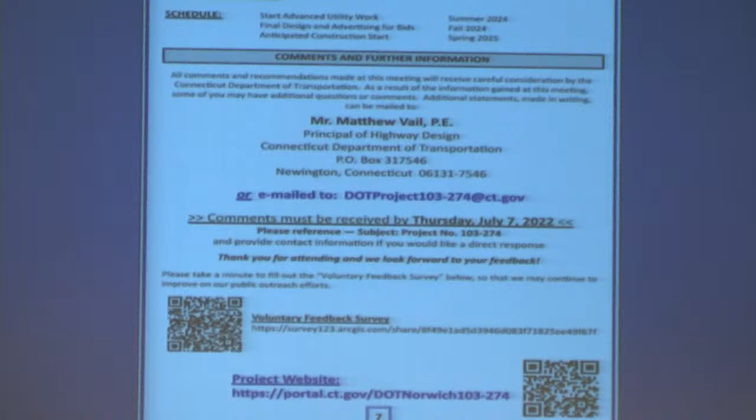Also tonight we have Mr. Matt Vail sitting at the table over there. He's the lead of our state highway design unit for in-house state design. On the back of the handout is Matt's contact information. So if you want to write to him, inside your handout, there's a paper pullout. You can write your comments on that paper pullout, fold it, put a stamp on it. It's already addressed to Matt. Comments will go to him. If you prefer to send an email, the email address is on the back of the handout as well. You don't have to write it down.

It's right there. In addition, we have other project information and resources at the project website. That's on the bottom of the handout as well, and there's a QR code that goes with it to bring you right there. That will get you digital copies of the handouts. Eventually a recording of tonight's meeting will be posted on that website. We also have surveys available on that website, and there's going to be a video of the project visualization available on that website too. So that's a good follow-up resource to look at in the next couple days for more information.

A little bit of housekeeping information. Okay, there's a demographic survey available on that website also. Civil rights flyers are on the table when you came in the room. No person shall, on the basis of race, color, national origin, be excluded from participation or subject to discrimination in the development of this project.

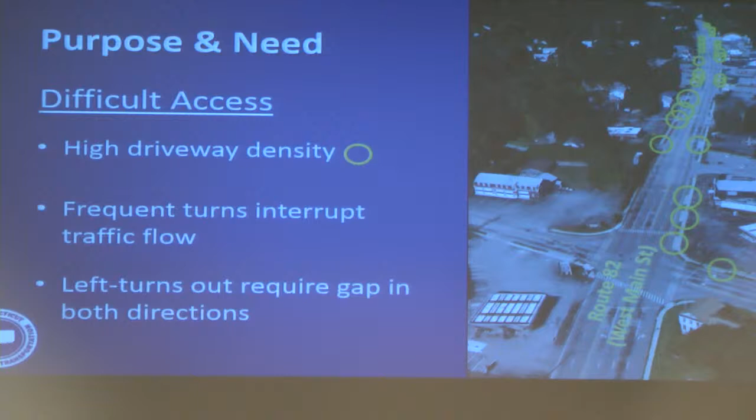Shown on this picture is Route 82. All the yellow circles indicate curb cuts. Those are driveways, most of them commercial businesses. Some of the businesses have 2 driveways. Traffic traveling on Route 82, 4 lanes, making left turns into the driveways, often backs up traffic in the through lane while they're sitting to make a left turn. Vehicles trying to get out of the driveways have difficulty exiting. They have to get gaps in traffic in both directions to be able to make a left turn, and in both directions it's 4 lanes. These maneuvers often result in sideswipe type crashes, rear ends, people getting frustrated, and poor traffic operations as traffic backs up behind a left turning vehicle.

In addition to the high number of curb cuts along that section of roadway, we also have 7 closely spaced traffic signals. And again, we're here tonight to look at Phase 1, 103274. That's the easterly portion of the work, mostly running from the Asylum Mechanic Street area, and will extend up through Dunham Street.

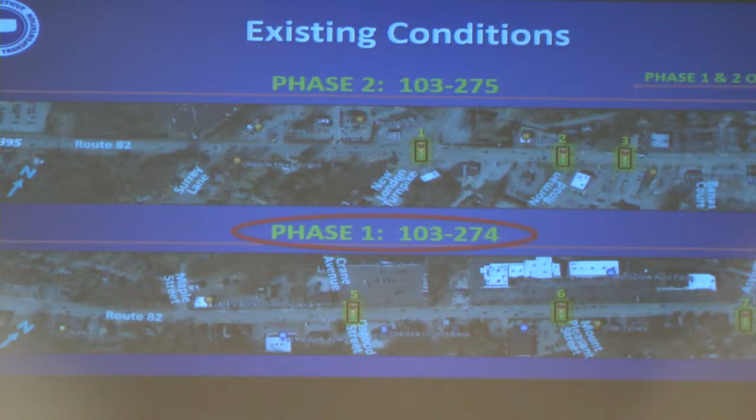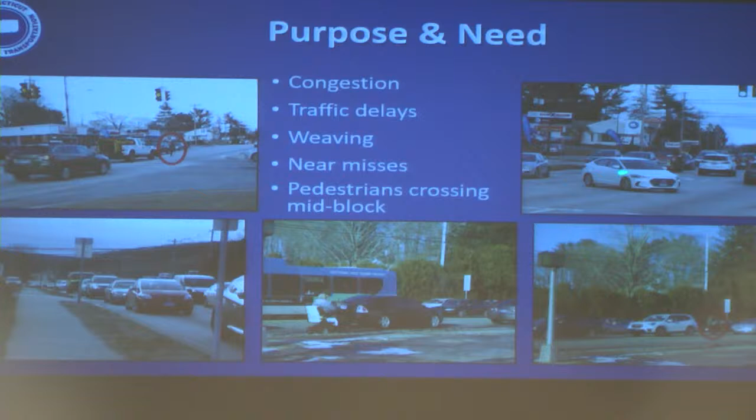This is your community. You live here, you drive it every day. These are the things that you see. Traffic congestion, pedestrians having difficulty crossing the roadway, vehicles wanting to make a left turn, having a hard time getting a gap, making that maneuver. Down by Asylum Street, more of the same thing. Pedestrians crossing the roadway with a very long crossing distance exposed to traffic. Vehicles wanting to make a left turn, stuck in a very congested intersection. Vehicles wanting to pull out of a commercial driveway, having a hard time finding a gap. Weaving, vehicles in the left lane, trying to get around a left-turning vehicle.

Here's a video of the Mechanic at Asylum Street intersection. It's your community, you guys see this, but just some reminders of what happens. This pickup truck changes lanes. That often results in sideswipe maneuvers, the weaving. That's very common. This SUV, he wants to make a left turn, but he can't. And he's getting impatient because he keeps inching up. He's getting closer to the light, but he hasn't executed his turn. And this truck, he wants to make a left turn also. He can't find a gap. Here's another one going to execute a weaving maneuver soon and pull out into the right lane. The black SUV, he still hasn't made his left turn. He's waiting.

Finally, the SUV, he makes his left turn on a red light. At Willows Corner, Dollar General, commercial driveway. Pretty indicative of any of the driveways along the corridor. A vehicle waiting to make his left turn. Can't get a gap in traffic. He needs a gap in both directions to be able to make his turn. He's got a large number of traffic going eastbound. Can't find a gap. He's waiting.

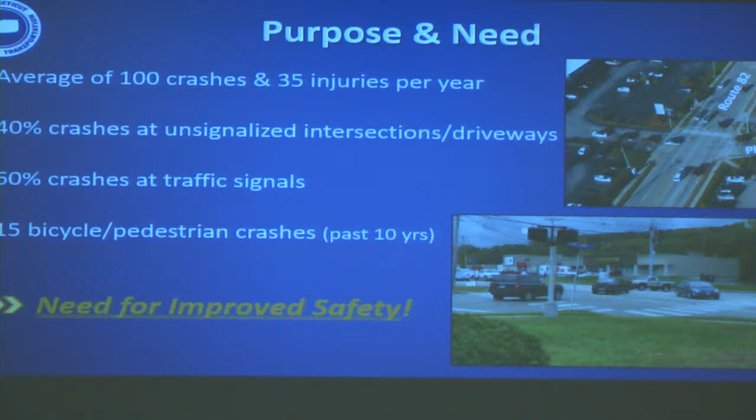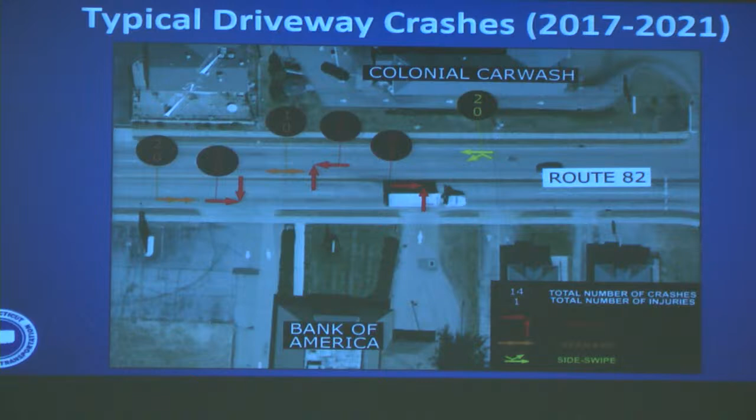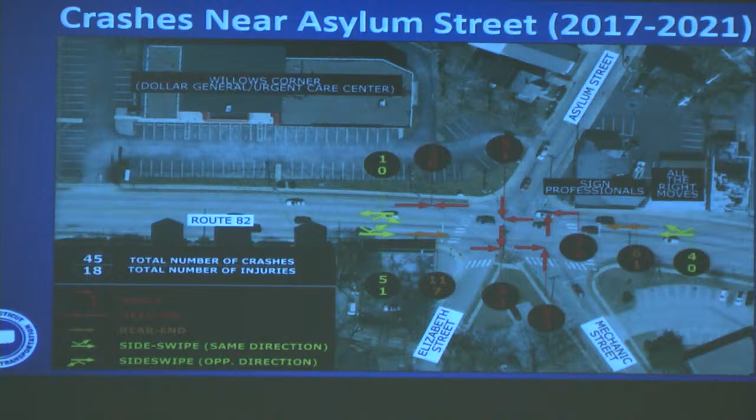Looking at Mechanic Street, Asylum, 45 crashes with 18 injuries in a 5-year period. Again, pattern crashes. These are the rear ends. We've got 6 rear end crashes going westbound, 11 rear end crashes going eastbound. The more severe ones are the angled crashes in the middle of the intersection. There's 5 of them coming off Asylum, 4 of them coming off Mechanic. These are the ones where people typically get hurt. And then there's a solution.

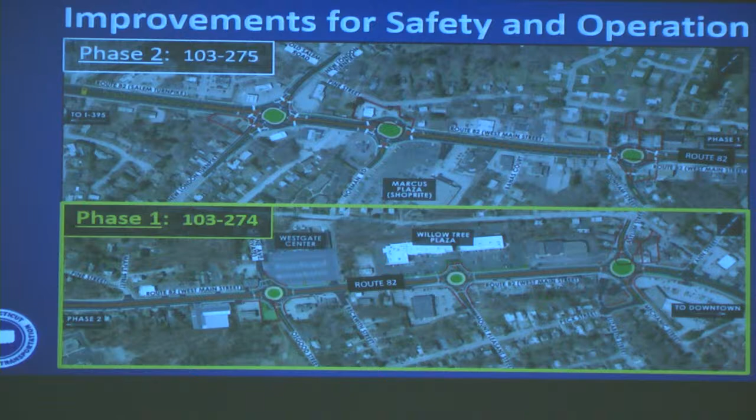To improve operation and safety, a median down the middle of the roadway restricts left-turning vehicles. That means when you're traveling on Route 82, all turns will be right turns. You turn right into the driveway you want to go in. If the driveway's on the other side, you go down to the roundabout, make a U-turn, go in. In addition, Phase 1 is going to have a road diet. That means it will go from a 4-lane roadway to a 2-lane roadway, 1 lane in each direction.

This shows how you would execute the U-turn to make a left, go down to the roundabout, go into your desired location. You don't have to stop and wait at a traffic signal. There's no waiting at a light. You don't have to stop in the left lane waiting for a gap in traffic while people pile up behind you, maybe worried about getting rear-ended. It's very simple. Go down to the roundabout, make a U-turn, go back, make a right. 1 lane in each direction. All turns are right turns. There's no crossing maneuvers.

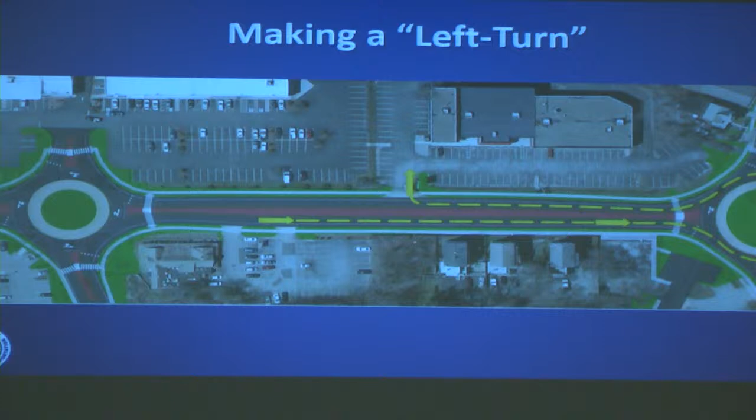We've built these types of safety features in other locations. We know they can work. They can work locally, and nationally there's data on them. The raised median, we know we can reduce turning crashes by 78%, injuries related to turning vehicles by 95%, and with the construction of the roundabouts at the intersections, we can reduce total crashes by 48% and severe injuries by 78% with this type of proposal.

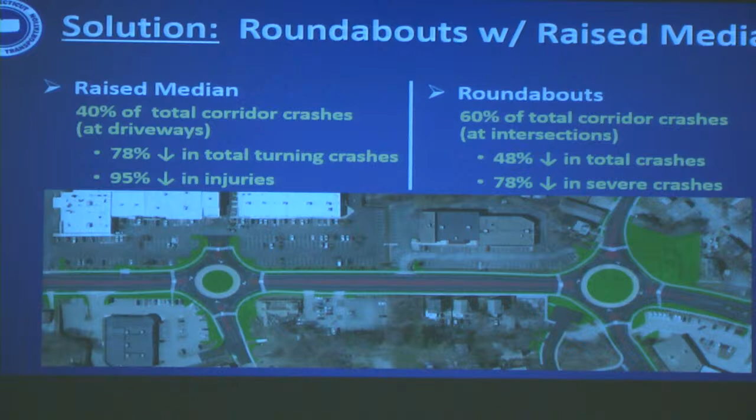One of our biggest successes, and also local to you guys, Salem, Connecticut, Route 82 and 85, a roundabout was constructed there back around 2012. I was part of the design team that led that project. Looking at the metrics years later, we found out it was a huge success. That intersection before construction had 23 crashes annually with 9 injuries every year. Almost 23 crashes, 9 injuries, people getting hurt. After we put the roundabout in, the crashes dropped 50%. Went down to 10 crashes with almost no injuries. It's a 90% reduction in injuries with the roundabout.

And the reason is the reduced speeds and removing the crossing maneuvers. There's no left turns, there's no crossing maneuvers. The crashes that occur at roundabouts, most of the time they're avoidable because people are going so slow, they can tap the brake and avoid the person that was coming at them. If there is a crash, it's usually a minor fender bender, as opposed to somebody getting hurt. But the good news is, we reduce crashes completely by 50%.

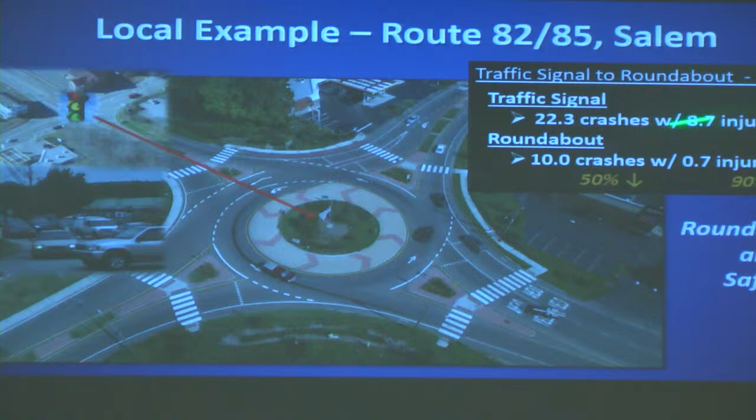And it operates very well. If you look at traffic, there's a lot of traffic flowing here. With roundabouts, you have concurrent movements going on all legs at the same time. These guys are coming in, going northbound, you have southbound traffic going, you have eastbound traffic going, all concurrently. Nobody's waiting at the light. They're all moving. It's improved efficiency.

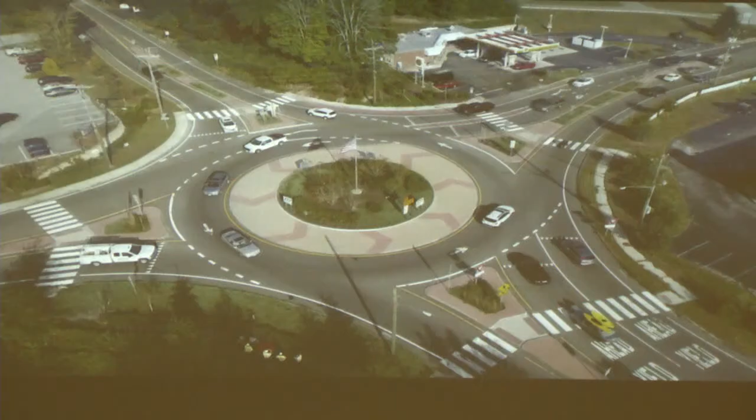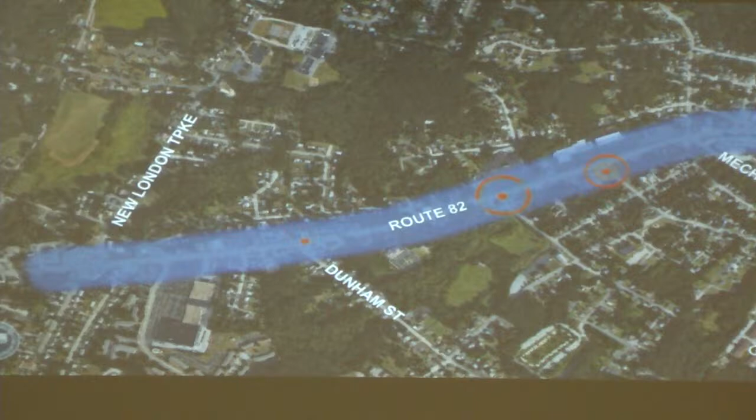The Connecticut Department of Transportation is investing in safety improvements on Route 82 in the city of Norwich. Today, the existing 4-lane corridor experiences higher than average crash rates following decades of commercial development and the addition of numerous driveways. The high number of access points makes it difficult for drivers to navigate in or out of driveways safely and efficiently. Utilizing historical traffic data and modern design software, the department has developed a proposal for operation and safety improvements.

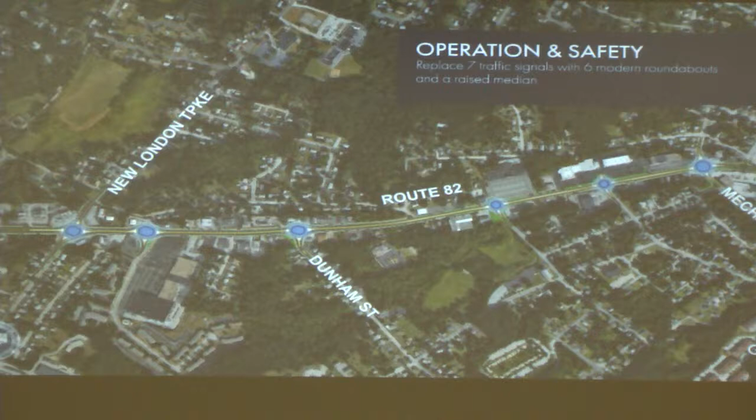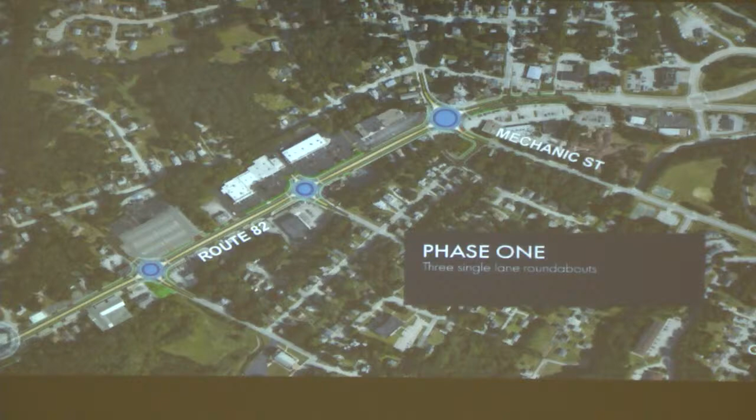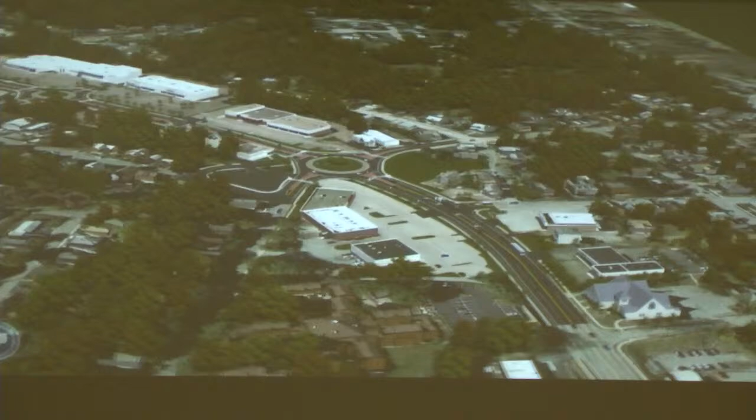The proposed corridor solution involves replacing 7 traffic signals with 6 modern roundabouts in addition to a raised median down the center of Route 82. Phase 1 of the project is to be completed first and will include the construction of 3 single-lane roundabouts along the eastern half of the corridor. The combination of roundabouts with a raised median will provide the most significant improvement in terms of safety for all roadway users. This design will provide a higher level of mobility to the businesses in the corridor with its efficient,

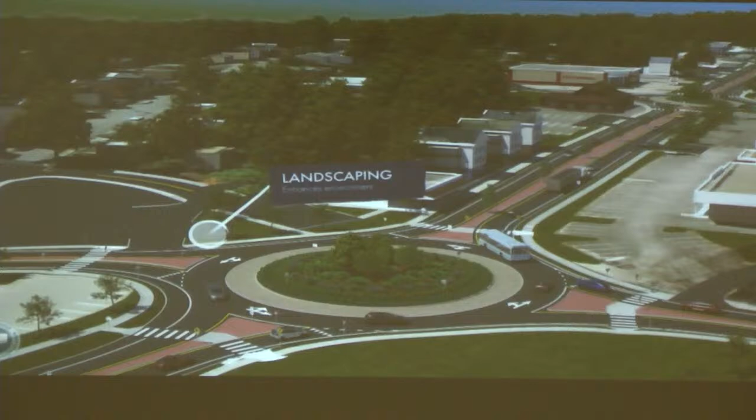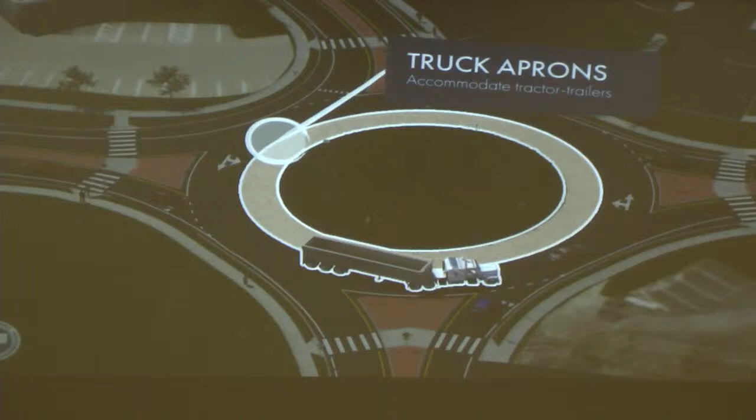free-flowing traffic features. The Phase 1 design will reduce the lanes down from 4 to 2, known as a road diet, further enhancing safety. Landscaping throughout the corridor will enhance the environment and create a more appealing experience for the Norwich community. Native plantings will be placed in the center island of each roundabout. Roundabouts will provide safer pedestrian crossing with less interruption to traffic and convenient U-turn capability for drivers looking to access local businesses. The rear wheels of a tractor-trailer truck will be able to mount the center island truck apron as needed to navigate the roundabout, while buses and other smaller vehicles will be accommodated within the limits of the paved circulating lane.

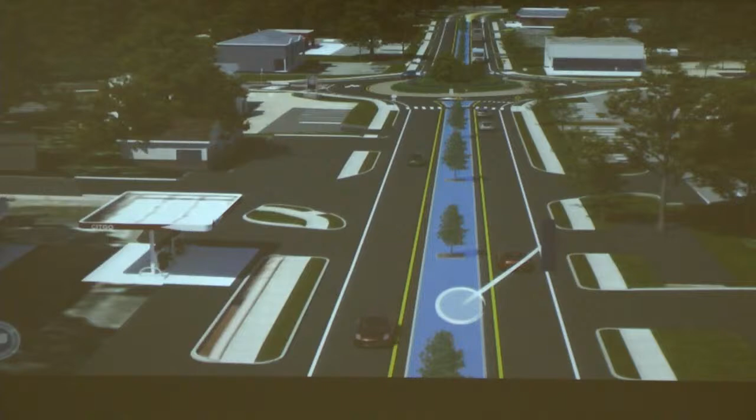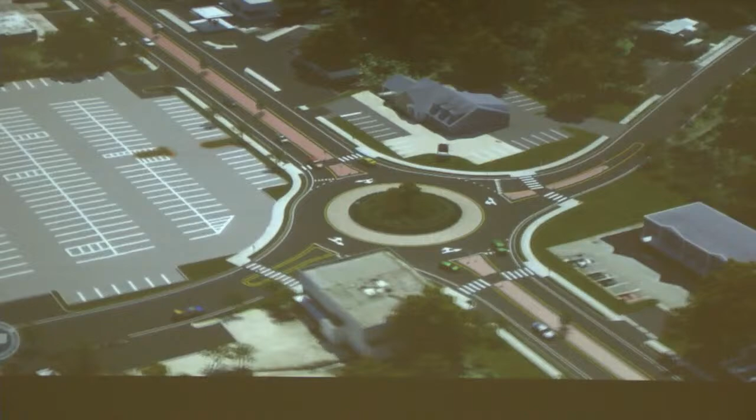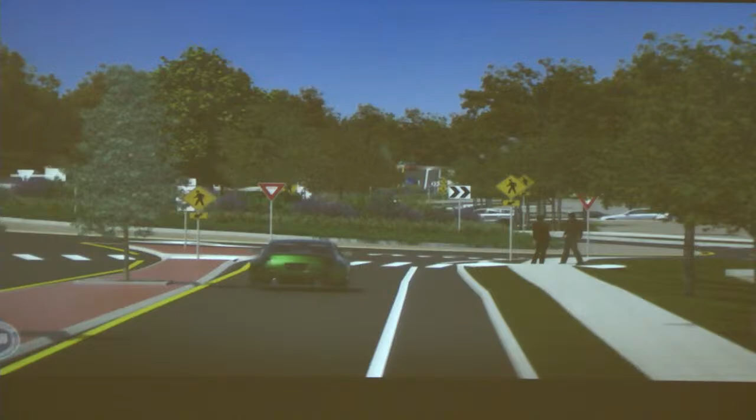The raised median on Route 82 will restrict left turns into and out of driveways. There will be an expected decrease in total turning crashes by about 78% and decrease injuries from crashes by nearly 95%. This change in conjunction with the new roundabouts will aid in traffic calming, slowing speeds through the corridor, promoting a safer environment for drivers and pedestrians alike. Despite slower speeds, there's a projected 25% reduction in travel time due to the removal of inherent delays associated with traffic signals. The entire Phase 1 corridor will incorporate 5-foot outside shoulders to accommodate bicyclists traveling along Route 82. The redesign of Route 82 will provide aesthetic enhancement and a more efficient corridor, creating a safer environment for motorized and non-motorized users alike.

So everything I discussed, that could happen in your community. Just a quick look at what it could be like. And now Mike Larice, the project engineer, he'll go through some more of the detailed design with you. Thanks, Scott.

As mentioned, the improvements on Route 82, the full movements, will involve replacing 7 traffic signals with 6 roundabouts. Because of how big of a project that would be, we decided to split it up into 2 separate projects. Phase 1 is in blue, Phase 2 is in yellow, and then this green area just represents a location where there's going to be work done during both phases of the project. So tonight's meeting is going to be just Phase 1. Like Scott mentioned, we're at like 30% design, whereas Phase 2 is still on the concept level.

So this is our proposal. It's 3 single-lane roundabouts, as well as a turnaround at the Dunham Street Route 82 intersection, which I'll cover a little bit more later. In addition, we have a raised median along all of Route 82, which is going to restrict left turns, and any vehicles that need to access a business or a residential property on the other side of the road can make a U-turn at the roundabout. So I'm going to go over each one of these intersections in a little bit more detail, but I did want to cover some benefits of roundabouts first.

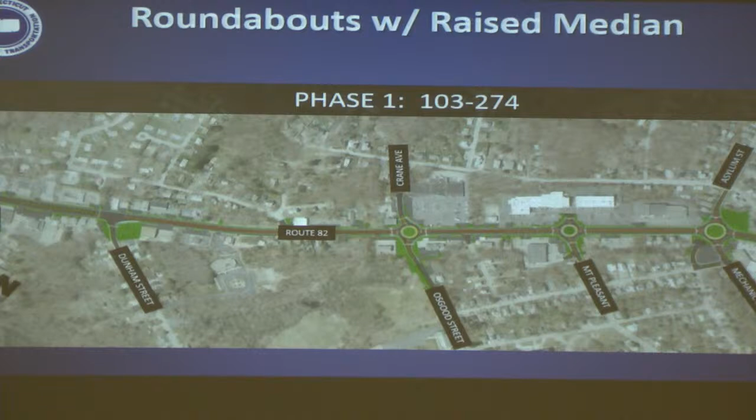So these diagrams show conflict points at the existing Route 82 intersection and compares it to our proposed roundabout. So all of these little dots, they represent a point where 2 vehicles could hit each other and there could be an accident. The red ones in particular are crossing conflicts, and they have the highest chance for injuries. Those are your T-bone accidents.

The existing intersections at Route 82, total of 40 conflict types, or conflict points, whereas at the roundabouts, you're only going to have 8, and more importantly, you're going to remove all of those crossing conflicts. And that's why we see such a safety benefit when we install these roundabouts.

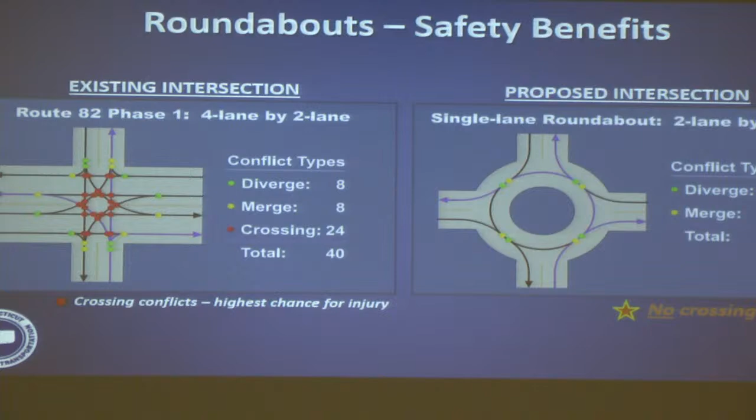The design is going to accommodate large vehicles very well. As you can see in the video up here, tractor trailers can mount the center truck apron in order to make all of their turns. And the diameter of the roundabout is going to be large enough that buses and fire trucks can navigate through the roundabout while staying on the paved surface.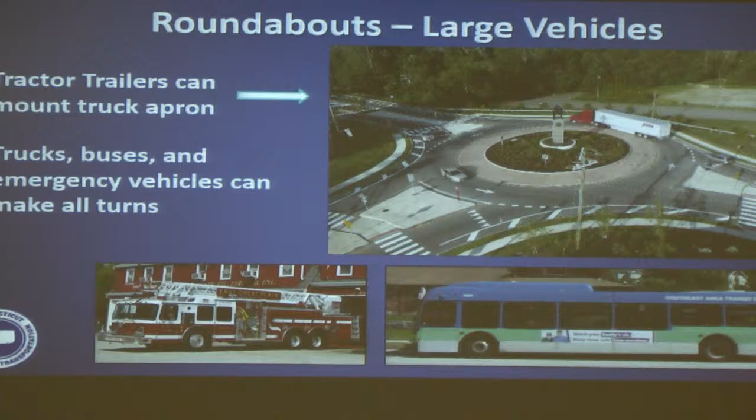If there was any type of emergency, though, that truck apron is mountable, and an ambulance or a fire truck would be able to mount it and get where they needed to go. Bicycles and pedestrians are going to be accommodated very well. We expect speeds through the roundabout to be 15 to 25 miles per hour.

Bicyclists are going to have 2 options. As they enter the roundabout, they can join traffic and navigate through the roundabout concurrently with traffic, just like you see in this picture. Or if they're not comfortable doing that, when they get to this crosswalk here, they can just dismount and walk their bike down the sidewalk, across the crosswalk, and continue through that way. Pedestrians are going to do something similar. They can walk down the sidewalk, cross the crosswalk, and continue on their way.

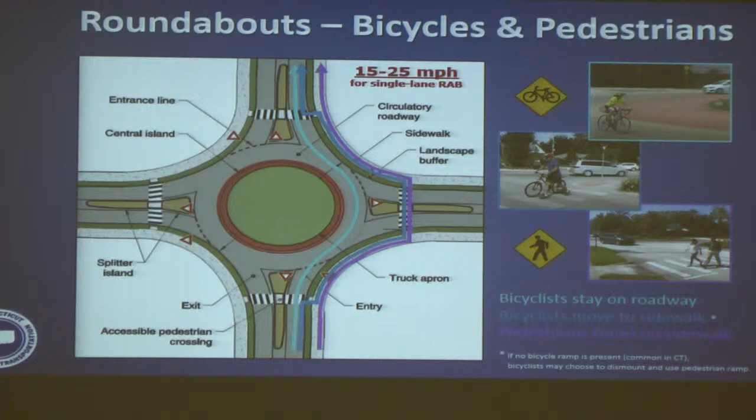One benefit that pedestrians are going to have is they're going to have a much shorter unprotected crossing distance. So if you were going to try to cross at the Asylum Street intersection right now, it'd be about a 55-foot crossing, whereas with our proposed design, you're only going to have to cross 19 feet, and then you're going to have that center island refuge area where you can safely wait and then cross the next 19-foot section when there's a gap in traffic.

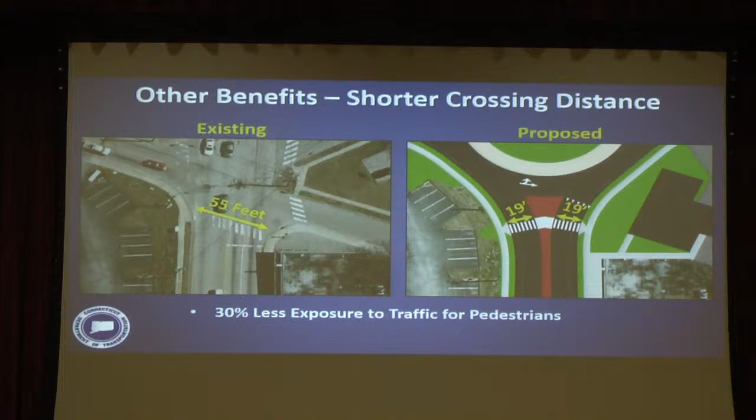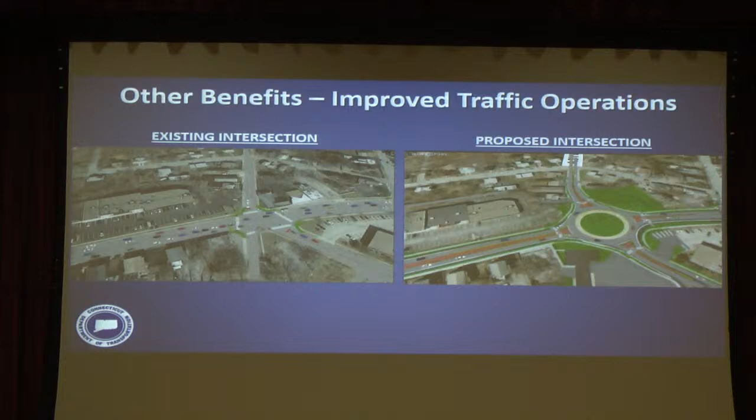This is a side-by-side simulation comparing the existing intersection to our proposed design. This is the same amount of traffic at the same time of day, and you can see how well the roundabout accommodates the design. There's very little backup, whereas at the intersection, whether you have a red light or whether you have a green light and people waiting to turn left, there's a lot of traffic backup on both sides of the road. And again, this is the same amount of traffic going through the simulation. So you can see how the roundabout performs much better.

From an environmental standpoint, as you saw in the previous video and on this video down here on the right, there's not a lot of stop and go traffic at roundabouts. It's much more of a rolling queue. Vehicles are constantly moving. That reduces the vehicle delay, but it also reduces the amount of emissions that are put into the air by vehicles, and it also simultaneously increases your fuel efficiency. And then there's the fact that roundabouts don't require electricity to work, whereas traffic signals do. So another inherent environmental benefit.

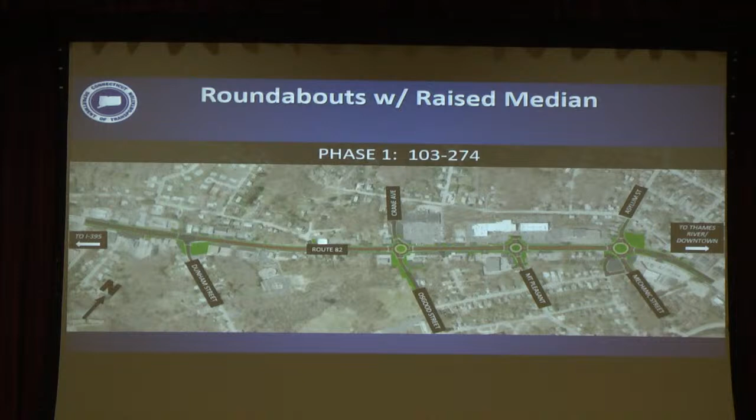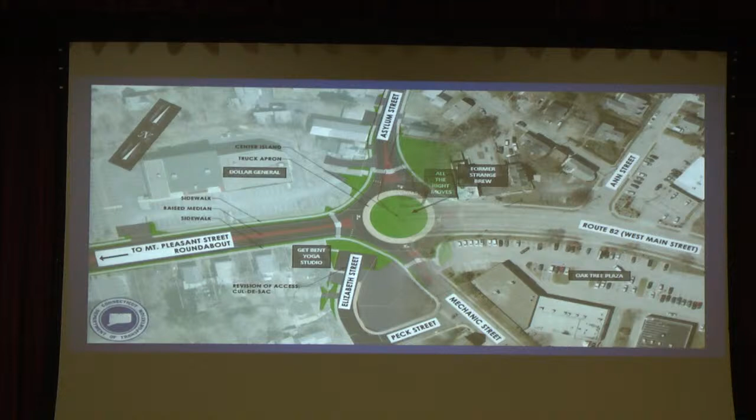So I'm going to go into each intersection now in a little bit more detail, starting with the Asylum Street Route 82 intersection. So existing, it's signalized. Elizabeth Street is a one-way road running away from Route 82. And as I bring in the design here, we have a legend on the bottom right, but all the green is going to be grassed area and landscaped, as you can see in the picture up here. On both sides of the road, the light gray is 5-foot sidewalk, and the red is that raised median that I mentioned previously. And this tan is the mountable truck apron to be used by tractor trailers.

So one thing I did want to mention on this slide is this 5-foot sidewalk that you see on both sides of the road. That's going to be the same at all the intersections, as well as consistent throughout the entire project limits.

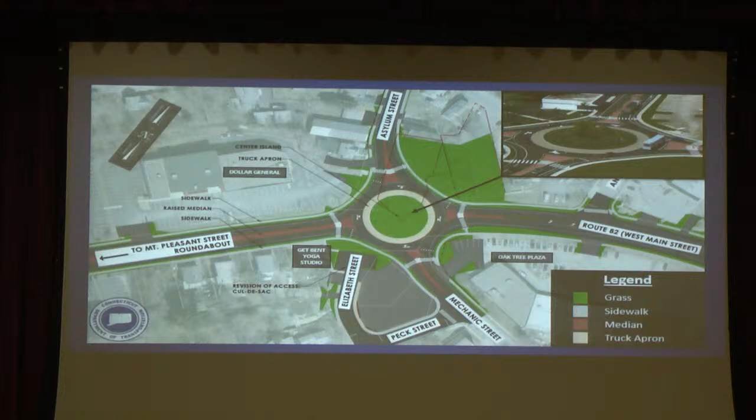In an effort to make sure that this intersection operated safely and efficiently, we did decide to cut off Elizabeth Street's access to Route 82. It was one way. We made it a two-way road, and anyone trying to access Route 82 can come down to Peck Street and take Mechanic Street to Route 82. As we continue west down the corridor, our next proposed roundabout is at the intersection of Mount Pleasant and Route 82.

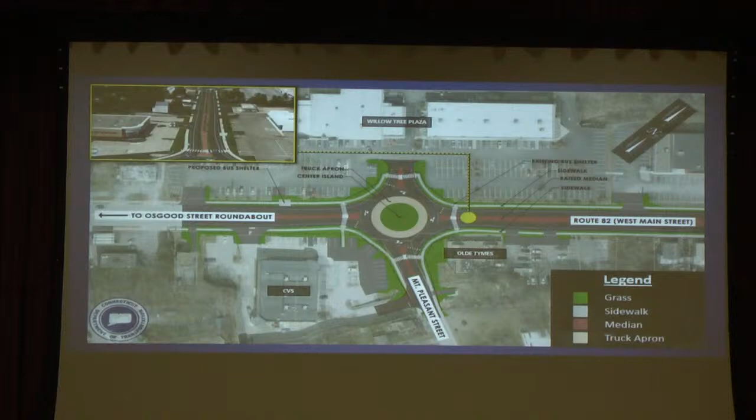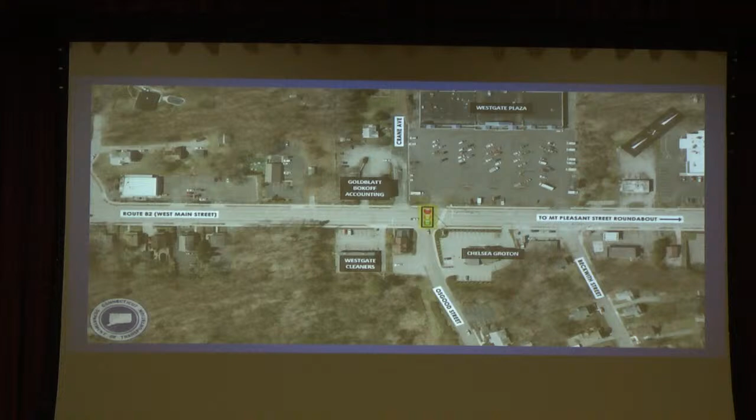So as I bring in the design, you can see that entrance is no longer there, so anyone who does this eastern entrance, they can come down through the roundabout and enter down in Crane Ave.

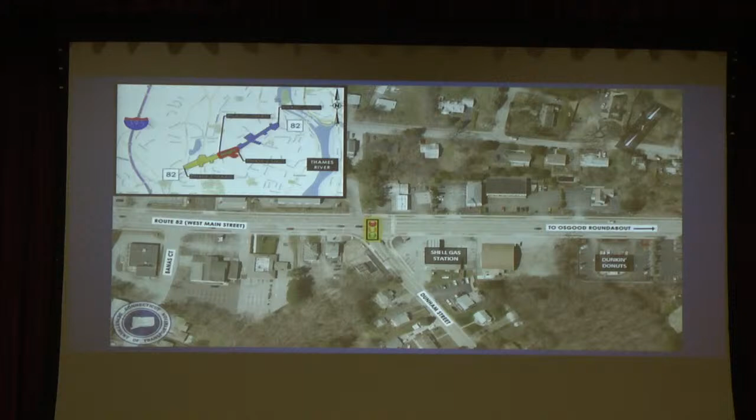So I've covered these three roundabouts, and we're going to continue west now to this Dunham Street intersection that I mentioned previously. This is in that green area where there's going to be work done during both phases of the project. As I bring in the design, you'll see that this intersection is going to remain signalized. So vehicles coming down westbound on 82 can come into this left turn lane, and then they can either turn left on Dunham Street, or they can make a U-turn maneuver and come down 82 eastbound.

And during Phase 2, this is going to become a roundabout at this intersection, but in between the two projects, we needed to ensure that vehicles traveling west on 82 could make this U-turn maneuver and access businesses on the other side of the road.

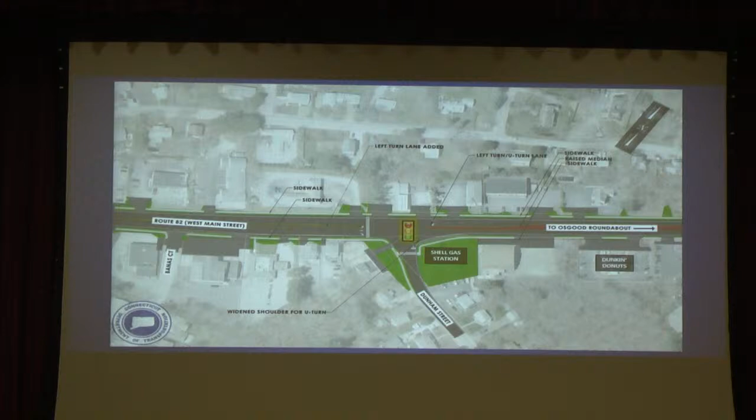There are some impacted properties with the proposed design. We're planning on 5 total acquisitions. The first one is going to be at the intersection we were just talking about. We'll be acquiring an Xtra Mart/Shell gas station. At the intersection of Osgood Street and Route 82, we plan on acquiring a barbershop/apartment building. And then at the intersection of Asylum Street and Route 82, we're acquiring 3 commercial businesses in order to accommodate the roundabout design. We also have 44 partial acquisitions or slope easements associated with the design.

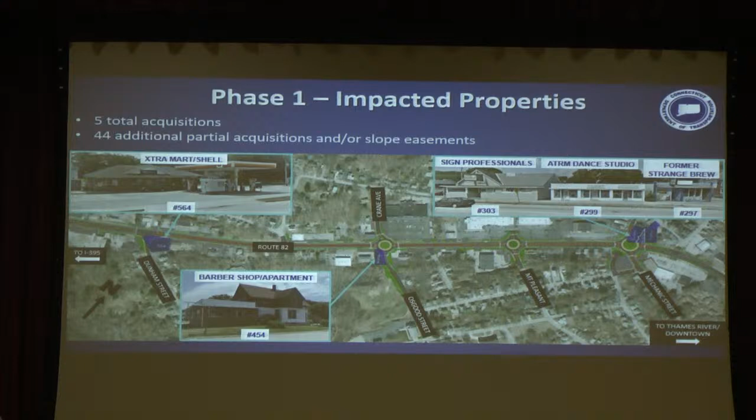And at this point, I'd like to pass the presentation over to Dennis, and he's going to cover the right-of-way process in a little bit more detail. Thanks, Mike. Good evening, everyone. My name is Dennis McDonald. As Mike mentioned, I'm a representative from the Connecticut Department of Transportation Division of Rights-of-Way. I'm just going to provide a brief overview of the right-of-way process.

So the function of the Division of Rights-of-Way is to acquire all property and property rights necessary for the project. This is done in accordance with the various statutes and regulations, including Connecticut General Statute Sections 13a-73, 13a-98e, as well as the Uniform Relocation Assistance and Real Property Acquisition Policies Act of 1970 as amended.

So once the right-of-way process is set to begin, each impacted property owner will receive a letter of intent to acquire, along with a property acquisition map. The letter provides a brief overview of the process, and the map provides a detailed visual representation of the specific property impacts. Soon after the letter and map are received or sent, a valuation process will take place, and once a value has been established, a written offer of compensation will be presented to each property owner. Property owners will be given time to consider the offer and negotiate if they wish.

If an agreement is reached, an acceptance document would be signed, and a closing would take place at a later date. If an agreement cannot be reached for whatever reason, the state will acquire the property rights via the condemnation process. Now, I understand this has a negative connotation, but many times this is done to keep a project on schedule. If the state does elect to pursue eminent domain, the original offer is deposited in the court system available for withdrawal, and property owners can continue negotiations or file a formal appeal for a reassessment of damages through the court system. If a property owner elects to file an appeal, it must be done within 6 months from the date in which the state files for eminent domain.

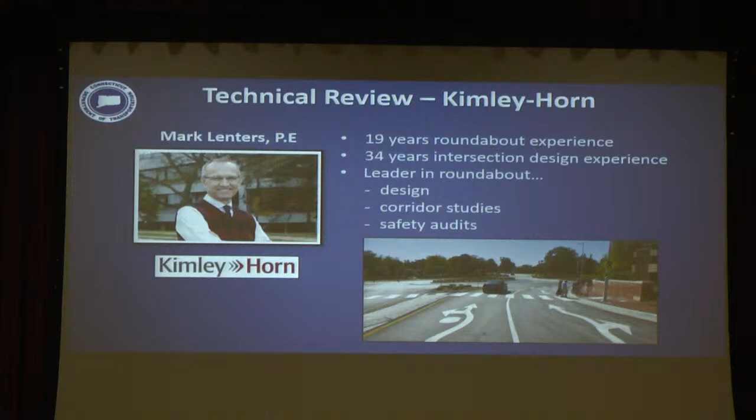I want to talk a bit about roundabout corridors tonight. I've worked on some research nationally. In 2014, there was a study of 9 corridors. At that time, there was an inventory of roughly 58 corridors of roundabouts, a corridor being 3 or more roundabouts in a series, spaced anywhere from hundreds of feet to thousands of feet apart. Some of them are in commercial corridors, some of them are in suburban areas, but they all share one thing in common in that they replaced traffic signals or stop control intersections, and in the majority of cases, they were safety improvements.

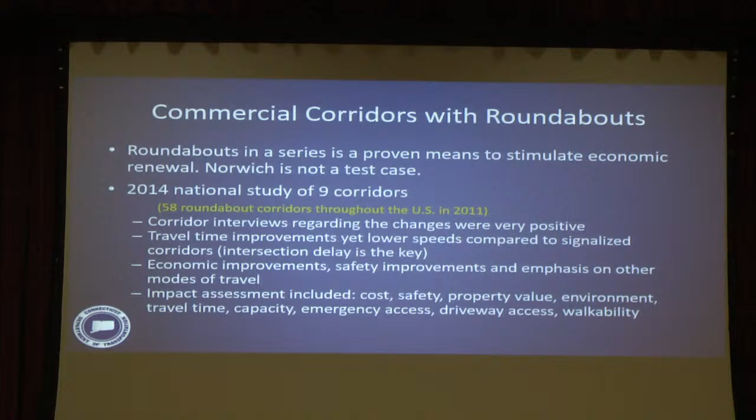So with that study in 2014, we conducted interviews, did travel time studies, looked at economic impacts and the benefits in terms of safety, and then impacts included cost, safety, property value, environment, travel time, and so on. And the research is entitled NCHRP 772, Corridors with Roundabouts.

So some of the considerations I want to focus on in particular, because in my background, I was an access manager for a county. I was a county traffic engineer for the early part of my career, and the toolbox was very shallow. When we had safety problems in a corridor, similar to what has been described tonight, we had very few countermeasures except to divide the roadway and cut off access. And that would mitigate the left turn crashes and the driveway egress crashes. But that would also starve business of access.

So when roundabouts came along in the 1990s, the first roundabout corridors, one was in Avon, Colorado. Those of us in this practice area of roundabouts closely monitored the impacts to see if we could solve not only the safety problem, but improve access and improve business opportunities. And that turned out to be a good news case right from the beginning. So we looked at some of the hard and soft measures, land use considerations, access management, and tax-based considerations.

I'm going to take you through a few case studies that are quite notable from around the country in no particular order, but they all have something in common, and that's they have roundabout corridors in some of their most important business corridors. And some of these measures that we looked at were livability and walkability, property value, some more softer things like aesthetics and placemaking. Placemaking is a big factor in supporting business. People want to come to a place, walk, get out of their cars. Community acceptance, of course, social equality and transportation equity, as we are so interested in these days, that all users of the road system get equal access.

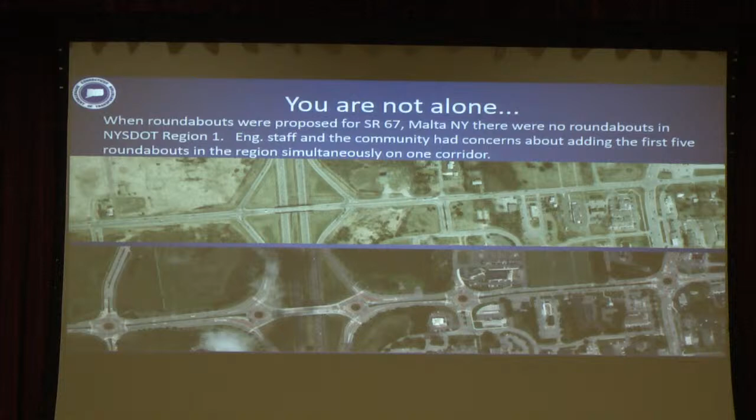And the spacing, there's no particular formula. These are just retrofits to existing conditions. So in another site in Malta, not so far away, public and stakeholders generally had a positive reaction to the roundabouts initially, and others were added to the corridor. And that seems to be the general response we see.

This one, a little farther to the west and south, San Diego, La Jolla Boulevard, was a real standout because they were suffering from this problem of too much pavement, problems with parking, problems with business access, long crossing distances, and safety issues.

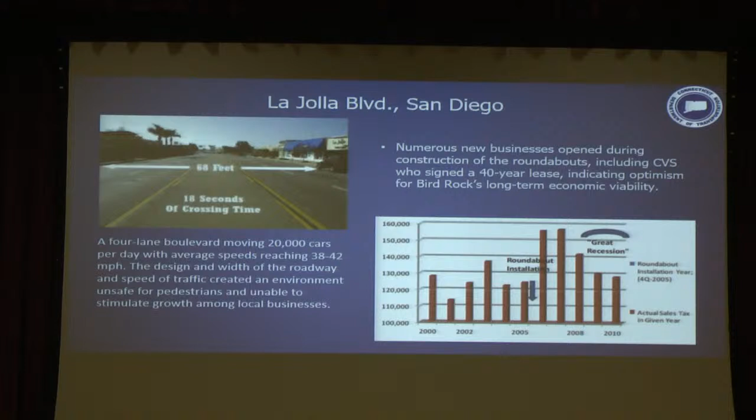So when they ventured into the roundabout options, you could see in 2005, there were some business impacts in terms of revenue and tax-based growth, but in the years that followed, heavy investment in the corridor. Reinvestment, redevelopment, sustainable, and then of course we saw the recession closing in on 2010. Other businesses signed longer leases because the viability of that corridor improved significantly with the use of roundabouts.

Sorry, I jumped one ahead.

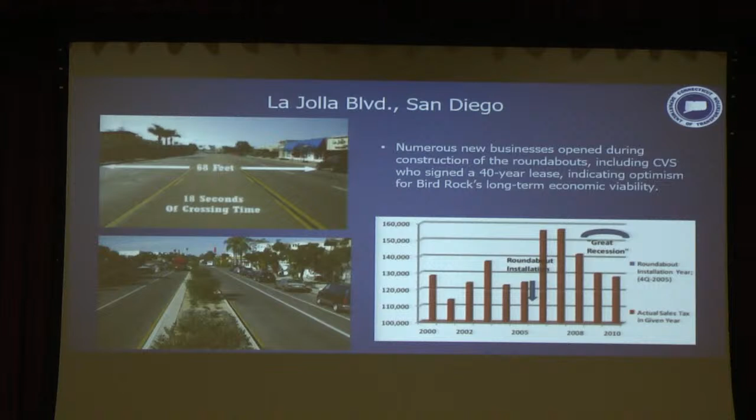And you can see the use of a median to separate and to beautify some of the corridor areas. They actually went for angle parking, and even though it was a road diet, they provided some additional amenities to support business growth.

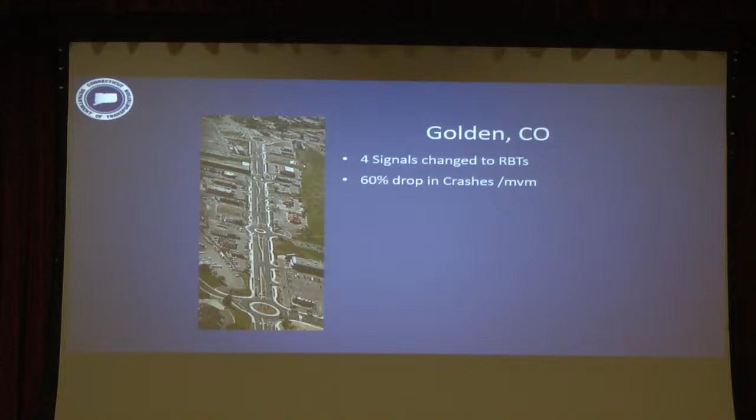Golden, Colorado was another standout, 2002. So we've seen 20 years of the effect of converting four signals to modern roundabouts, 60% drop in crashes, 94% drop in injuries, and one of the most notable things was the 85th percentile speed, or the speed at which at least 85% of the drivers operate, was reduced from 48 to 33 miles per hour.

But the interesting story is the travel time actually went down. So speeds went down, so you'd think it would take longer to travel through the corridor, but it actually took less time to travel through the corridor, even at lower speed, because the intersection congestion was reduced. And that's the same thing that you're counting on for this kind of a corridor.

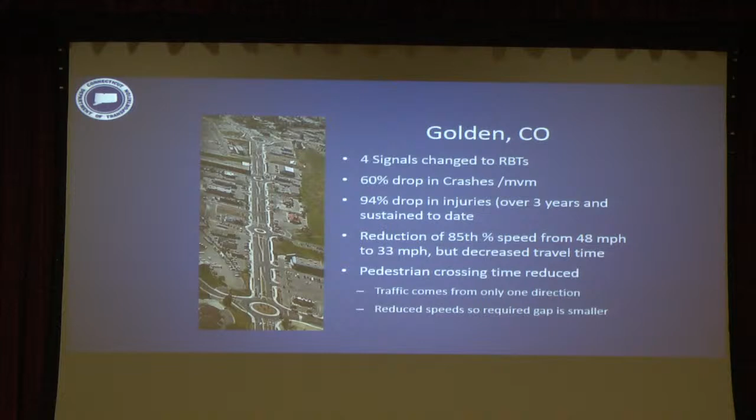So very typical strip commercial corridor, multiple business types and uses, banks, fast food plazas, front commercial, service commercial, all of them depending on roadway access for their viability. The division of the roadway was organized and planned to essentially create U-turn opportunities for some of the smaller businesses, and some of the anchors were given direct access.

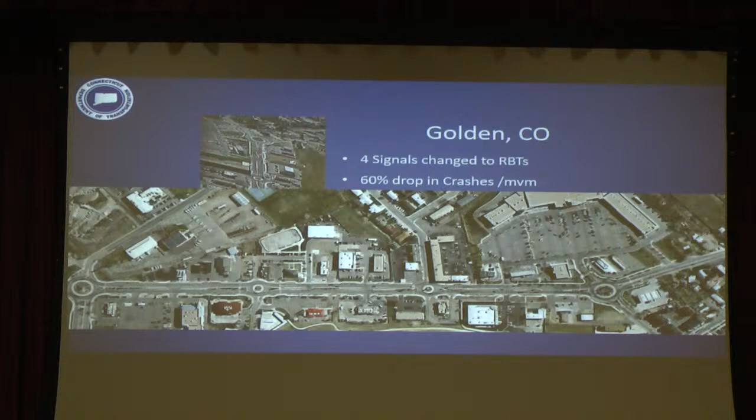But essentially, the access was organized so that they could improve safety and get that 60% drop in crashes that I commented on. So you can see a sea of pavement on the left in the original design with the two-way left turn lane, sometimes called a suicide lane. Traffic having to make staged left turns, come out into the center, stop, wait for a gap, and go was inherently unsafe.

And in the after case, you see a landscaped, beautified corridor with better setbacks for crosswalks. So a much improved pedestrianized environment. So in the after condition, a vibrant community. Now 20 years since, traffic flows have increased. They're not exceeding the capacity of the roundabouts, but they've experienced more exposure for the businesses. And then a 60% increase in retail sales.

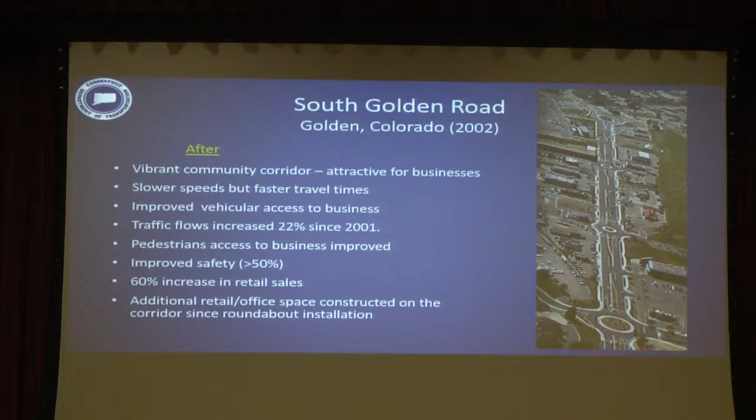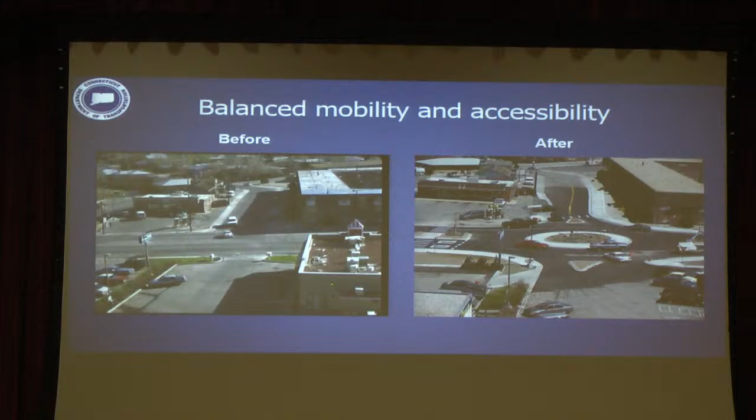So again, you can see some of the effect of access that's indiscriminate or not organized for safer movements between properties, and certainly not for pedestrians. And then the slower operating environment associated with roundabouts makes ingress and egress at driveways much more predictable and uniform. So inherently, it's going to be safer.

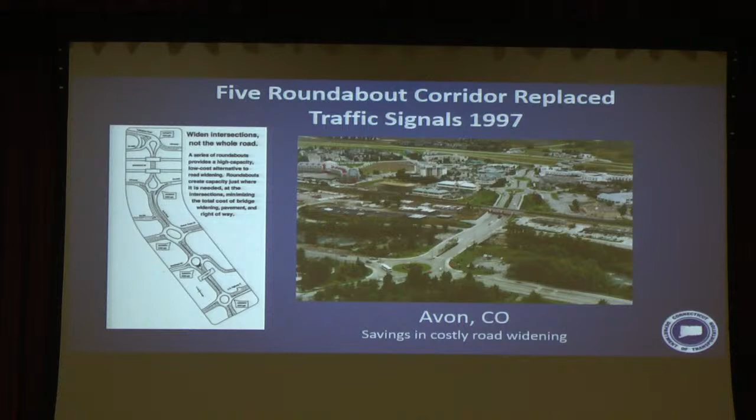The signals were replaced in very tight spacing, and the medians were added, the U-turns were added. This is Beaver Creek here, and I-70 from Grand Junction to Denver, where skiers get off on weekends, and you can imagine the congestion. So these are two-lane roundabouts, but the access was upheld and much safer in terms of overall corridor operations.

And so how did they fare in terms of taxes? So they saw a steady increase up to about the recession from '04 to '09. And then in the years '14 to '19, this is the data I could get readily off the internet, the sales tax revenue in retail and accommodation, of course, hotels, just a steady increase. And because Avon Road is the main spine for the town of Avon, if that wasn't working for them, they wouldn't realize this kind of tax base increase in retail and commercial benefit.

This next one, up in Green Bay, Wisconsin, where I spent 10 years, I worked on a corridor project with US 41 where we constructed 41 roundabouts in about 7 years at all the interchanges right around Green Bay, Packers Stadium and up and down the section of 41. But this community called Neenah asked for roundabouts in a corridor, and by 2017, they had 3 and then a 4th one over to the right.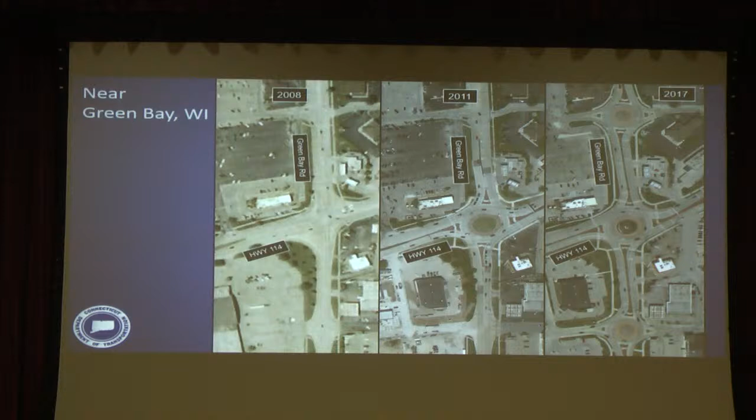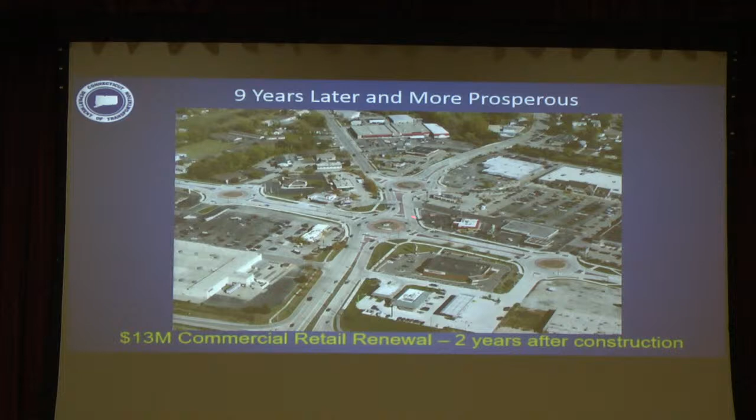And they divided the roadway. Access was so problematic it didn't matter if they could get access because it was unsafe anyway. So the medians helped with the U-turn opportunities, and I think there's a little video clip here. But in the 2 years after, unplanned, unorganized, $13 million was invested by the local business operators between the plazas, outbuildings with McDonald's and different small banks and operators, gas stations, etc. They saw the benefit of that.

So in summary, corridors have been converted for economic benefit. This one, the conversion is really for safety and operations. But that's the good news story, that when you do a safety project, you're going to get that economic opportunity as well. Roundabouts and corridors promote sustainable safety. That's safety that doesn't require additional intervention. No more red light cameras, very little speed radar enforcement. It's self-sustaining because just by nature of the roundabout slowing traffic, it creates a safer environment.

And as I mentioned before, it's not an experiment. It's been done before a sufficient number of times that we know that this is going to be a success for you. Scott?

Back to Norwich, guys. We've been working with the city for several years on this project. We've been to several council meetings. We've met with Public Works quite a few times, a lot of business owners along the corridor. We've been listening. One of the common themes we've heard for the past 5 years: minimize traffic impacts during construction. We've thought about ways to mitigate those types of delays, inefficiencies. We have a few proposals for you tonight that we're planning.

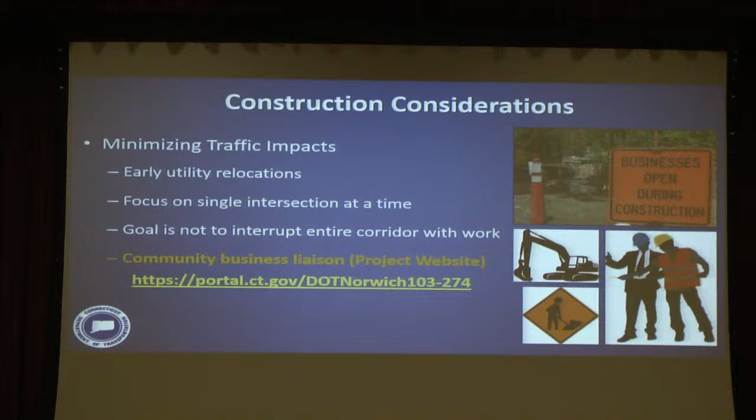Along the same lines, at several council meetings, we've been asked to consider as much night work as possible so that the roadway is not interrupted during the day. It's kind of a delicate balance because there are some residential properties in the area and you do have noise from night work. But there are certain activities that would be a couple of nights apiece here and there that we think we could do at night, and it would help with traffic disruption during the day.

One of those is setting curbing. The granite curbing we're going to set occupies a lot of equipment and work within the roadway, and it causes interruption. Another one is pouring of concrete. We've got medians, stamped concrete medians we got to pour, stamped concrete truck aprons. The concrete delivery truck shows up on the job. It's got a big chute. The concrete's got to come out of it. He's usually parked in the road, occupies a lot of space. If we could do some of that at night, it would also help minimize traffic impacts during the day. And milling and paving, something that we routinely do at night, we certainly could do here.

But I have to thank the city of Norwich. We've been working with Public Works quite a bit on the project over the past few years, and they've been gracious enough to suggest that they believe the city of Norwich would allow us to do road closures on the side streets for 2 weeks at a time. And this would help us quite a bit and be able to build the project efficiently. And it doesn't mean close the entire street. We're talking about just closing the interface at Route 82. And the good news is these side streets have such a grid network. If Osgood is closed, you can go down here and use Beckwith and come back around. It's a very minor inconvenience that has a big gain.

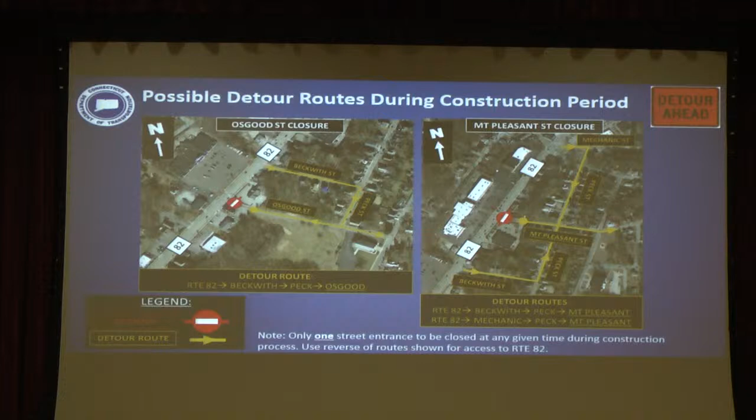And same thing on the eastern end of the project. You're down by Mechanic and Ann Street. There's Mechanic and Asylum Street. There's local workarounds there for traffic. Passenger cars certainly will use Ann Street. Truck traffic, I would expect, could come down Newton Street and then onto New London Turnpike to access Route 82 if you had some larger vehicles. But the point is, there's a pretty extensive grid network that runs along Route 82 that for short-term durations, 2 weeks at a time or so, these avenues could be used. And it would help us accelerate construction quite a bit.

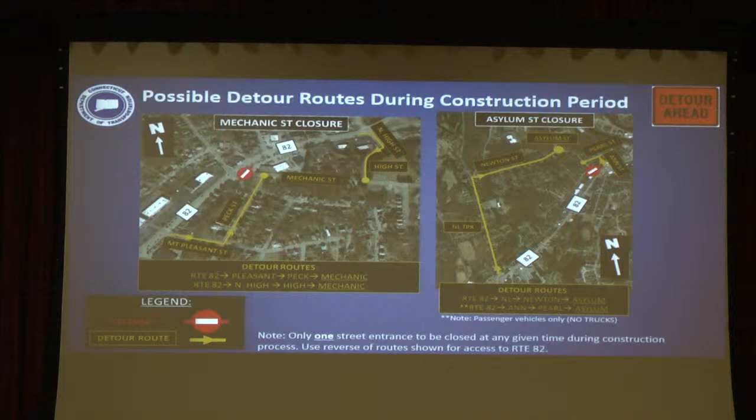The cost of our project was estimated at $20 million. It's funded with 80% federal funds, 20% state. Bids would go out in fall of 2024. We'd also look to start the utility work around that time. So you would see some contractors working out there. There'd be utility contractors moving the poles, hopefully work through the fall, winter, and into the spring. In the spring of '25, our roadway contractor would get started and work for 2 construction seasons. Construction seasons, April through November, and that's where most of the heavy highway work would happen. There may be a little work through the winter during the 2026 year too, but predominantly most of the road work happens during April through November.

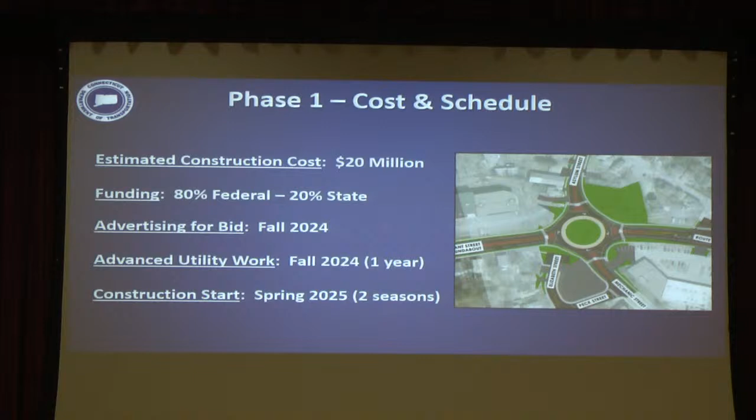And again, this is the safety solution that could help a lot out here, the roundabouts with the raised medians. Tonight's meeting focuses predominantly on phase 1. We did give you some information that's kind of an awareness of what's being discussed for phase 2. This one is just in concept design. We haven't taken that too far. But at 30% design, we're still very early in the design process on this one. And we're here to get your feedback and your comments.

The construction schedule for phase 1 starts in 2025. We'll go through 2026. The proposal is when that's complete in the fall of '26, spring of '27, phase 2 would start, and that would last 2 years as well. So phase 1 would be complete '26, '27, start phase 2. There will be a separate public information meeting for phase 2, probably in 18 to 24 months, and we'll focus more on the design efforts for that section at that time.

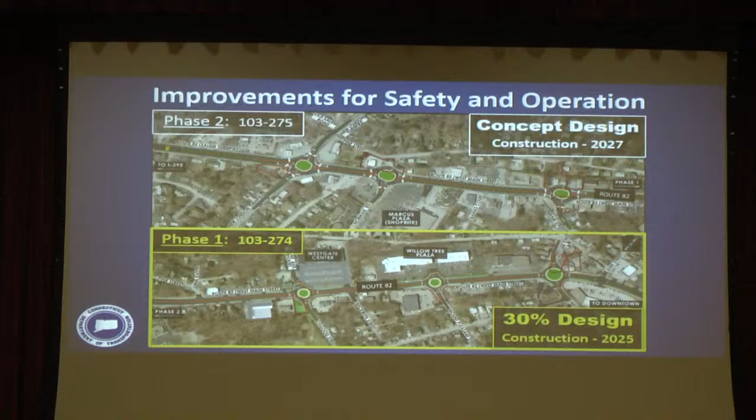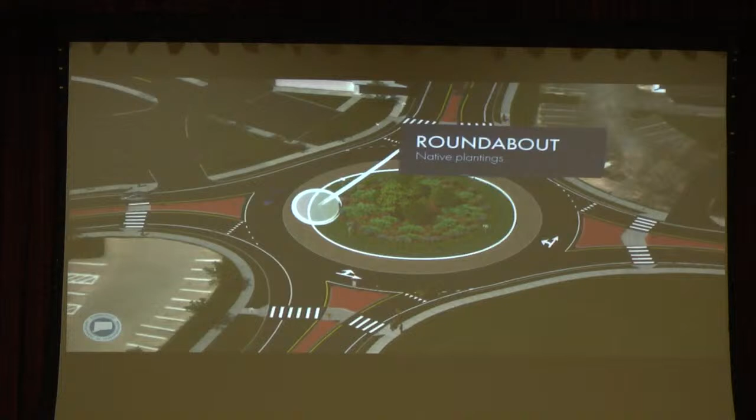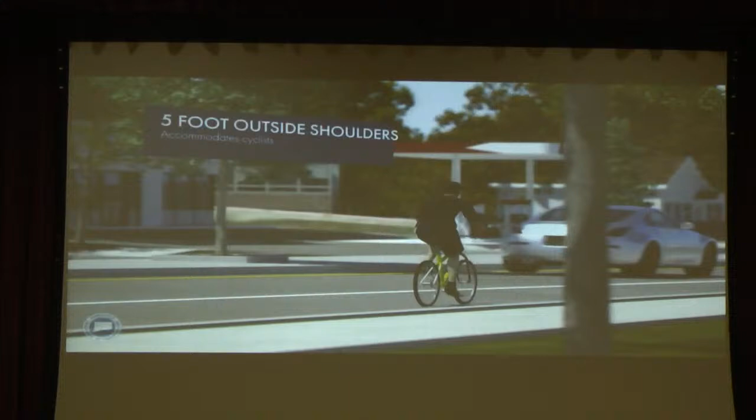This is what we could do. It's a quick summary. Nobody waiting, idling vehicles, improved efficiency through the corridor. In another state, they estimated 24,000 gallons of gas saved per roundabout per year. 25% reduction in travel time along the corridor because you don't have to stop at traffic signals. Better accommodations for bicycles, for everyone.

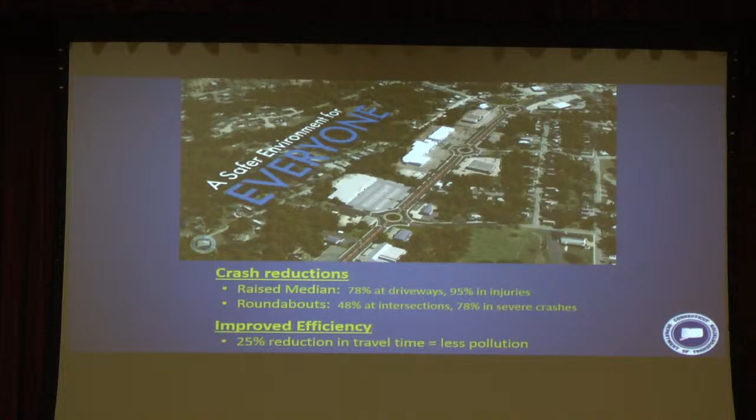We can improve safety. By implementing the raised medians, we can reduce crashes by 78%. By implementing the roundabouts, we know we can reduce crashes by at least 48–50%, and severe crashes by at least 78% based on national data.

And now we'll move into the question and answer session. I want to thank everyone for your patience and holding your questions to the end. There's 2 microphones up in the audience area, one on each aisle. I'm going to ask that we use those for facilitating the question and answer. If you have a question, please ask it in this process tonight with the microphones. We're not going to speak with people one-on-one after the meeting, just for our safety and your safety.

But I do want to remind everyone, my contact information is on the front of the handout. Again, my name is Scott Bushy. My phone number is there. My email is there. I'm accessible to you. If you want, I can come out to your property. I can discuss where the edge of road's going to be, your driveway, parking spaces, anything like that, any specific questions you might have to your specific property that may be best handled one-on-one. So let's start the Q&A.

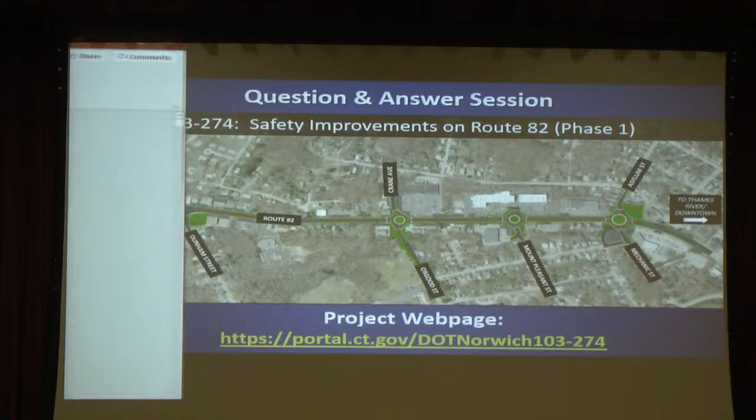My name is Steve Cohen. I'm a property owner on, it's 684 West Main Street, the old gas station I just knocked down. It's good to see you, Scott. A couple questions for you. Mark Lenters, question for you. You mentioned a couple of examples on the West Coast. I lived out there for 15 years, and so my question for you is how wide was the road in San Diego that you used as an example, and how wide is our road here on Route 82?

The width of the pavement on the La Jolla Boulevard was 68 feet. And that's slightly wider than the corridor here. This Route 82 doesn't have a center two-way left turn lane, and La Jolla Boulevard had 4 lanes plus a two-way left turn lane, so a total of 68 feet.

Okay, so it proves my point. You got to realize the roads out west were designed like 30 years ago or 50 years ago. The roads here in New England were designed 300 years ago. It's a lot different. You're coming to Norwich, telling the people of Norwich, hey, you have a problem, and we're here to solve it. Did anybody from the city of Norwich come to you, anybody at the state, and say, please help us? We have people getting hit by cars. Please come help us. Did that ever happen?

The answer is yes. This section of roadway has been studied by the city, the state, and the regional planning agency for the last 20 years. And locally, it's been known as Crash Alley. There's been a lot of studies done, crash analyses prepared, and alternatives investigated. And back in 2005, one of the tools we had in the toolbox at the time to try to address safety here might have been to put in a two-way left turn lane. Like Mark said, a suicide lane down the middle of the road.

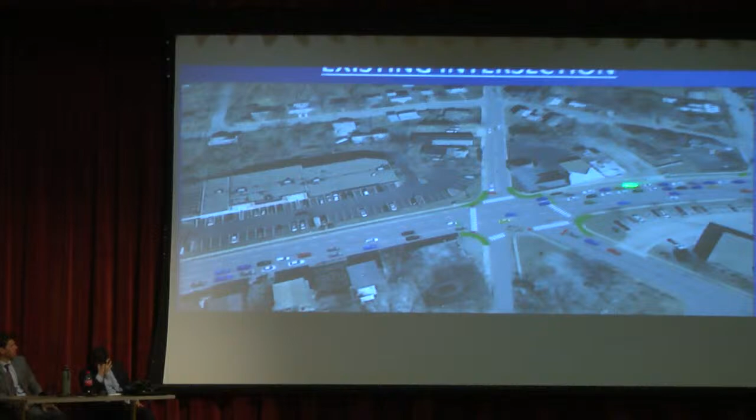Thank you. Mike, can you go to the VISSIM simulation that was part of Mark Lenters' presentation? We're talking about single lanes and traffic flow, and in response to that, I just want to put up the traffic simulation that we brought with us again tonight. If you take a look at this, here's the signalized intersection. The traffic's queuing up, it's backing, it crosses some of the driveways. People want to get to the driveways, they can't. And that's because of the stop condition.

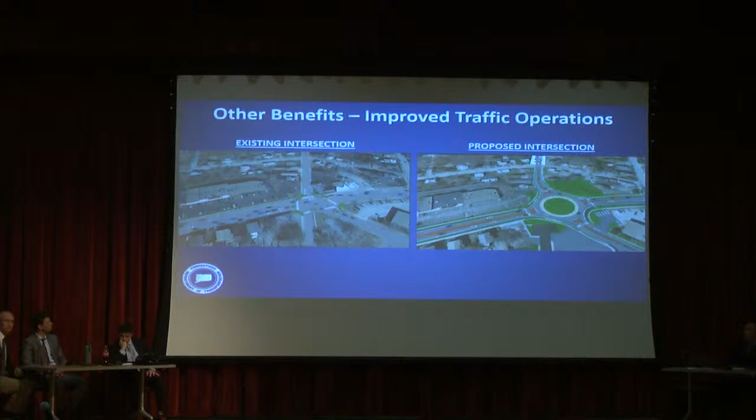The same amount of traffic is in the roundabout. That's the same time of day, the same amount of traffic. The difference is just that the roundabout works more efficiently. You have concurrent movements, multiple legs being able to enter the intersection and go at the same time. And that level of efficiency is what allows you to go down to a single lane. And if you look at these two videos side by side, it almost looks like there's less cars, but there's not. It's the same amount of cars. It's just that they're moving through the intersection much more efficiently. I think you'll also notice that there's more gaps. It's certainly going to be easier to drive. Right out of the driveway, go down the roundabout, make a U-turn.